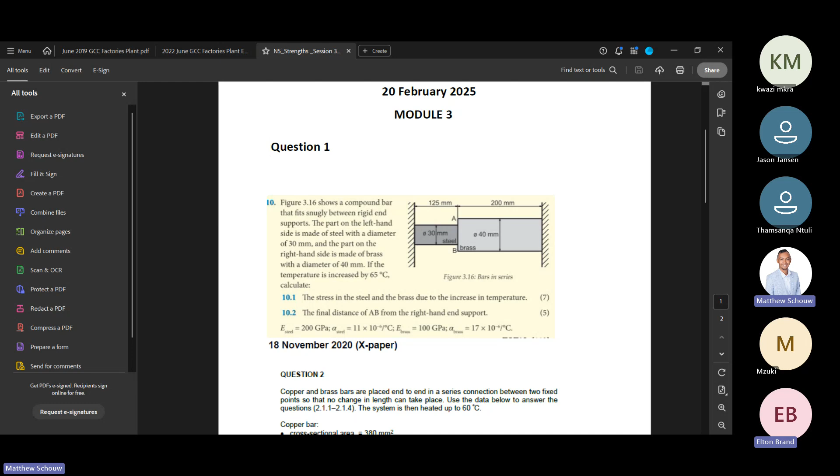I can't see your screen. Did you draw somewhere else? Because I just see the question, I don't see drawing. I drew something here. It's not appearing? Yeah, it's not displaying. Okay, it's on the whiteboard. Can you see now? Sorry about that. Yes, thank you.

Cool. So I was just explaining the loads. There's a pressure load in terms of fluid, water, air maybe. And I'm talking about the change in temperature, and giving a quick illustration of where this could be a big factor. Let me just quickly undo all of this. We don't need that.

All right. So reverting back to the stuff we're going to do, I'm just going to skim over some theory for you. Let me just open up my notes. So again, we have series connection and parallel connection, right? We're all familiar with that. And I want to bring something to you.

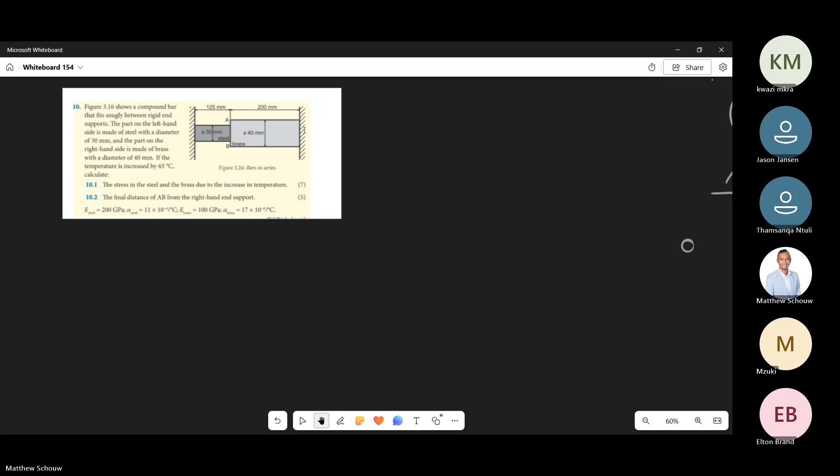It's just a lot of things, a lot of other theory, which I'm assuming you guys are actually going over, and I don't want to do all the Mickey Mouse examples. So, yeah. So when a material is in series, right? And I am accelerating this process here. And I want to take this, okay. So if you have exactly the same arrangement, just to explain to you.

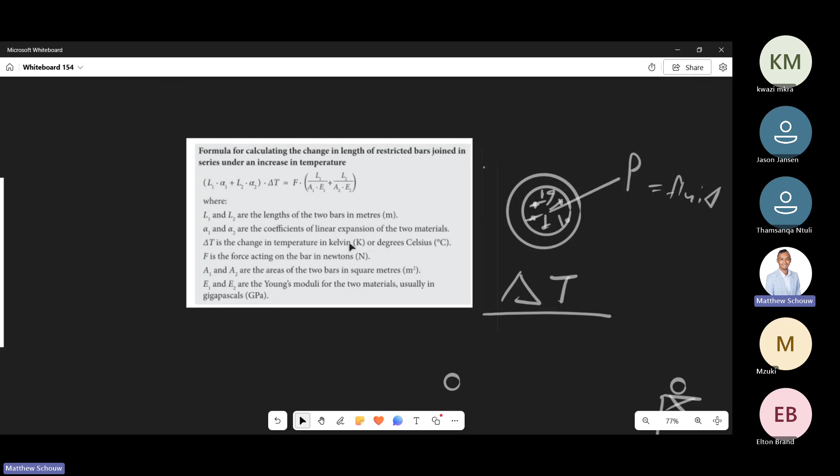Okay, so before I get here, do you recall when we were talking about the previous thing, where we have something like this with another bar in series? You apply a load here, and what happens here? Give me the formulas, the force. The total force is equal to... Jason, Elton? F1 plus F2. Not plus, they're equal to each other. Remember? Series. However, the change in length, we add them together.

Guys, Black Label's not good for the brain, eh?

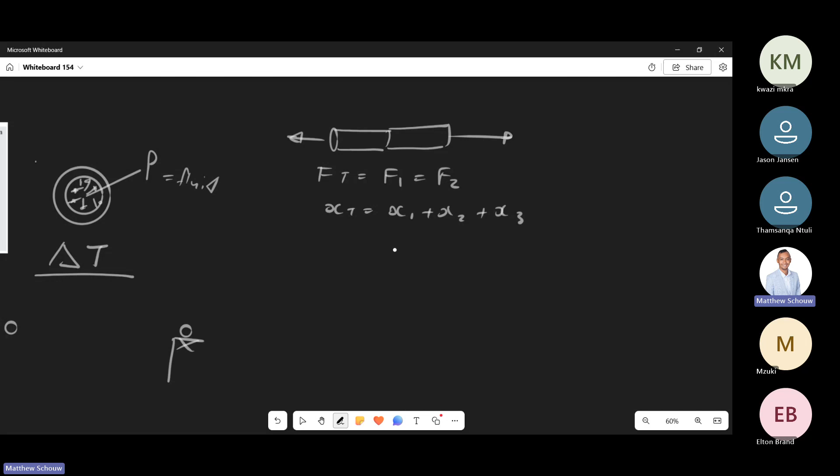Okay. So then the next case would be we have some structure, let's just call it a pipe, and there's another structure inside here, another element. And we apply a load, a compressive load, let's say. Tell me the force relationship here. The total force is component 1 plus component 2. 100%. Whereas the total change in length is? The same. Okay, they're equal. So remember this.

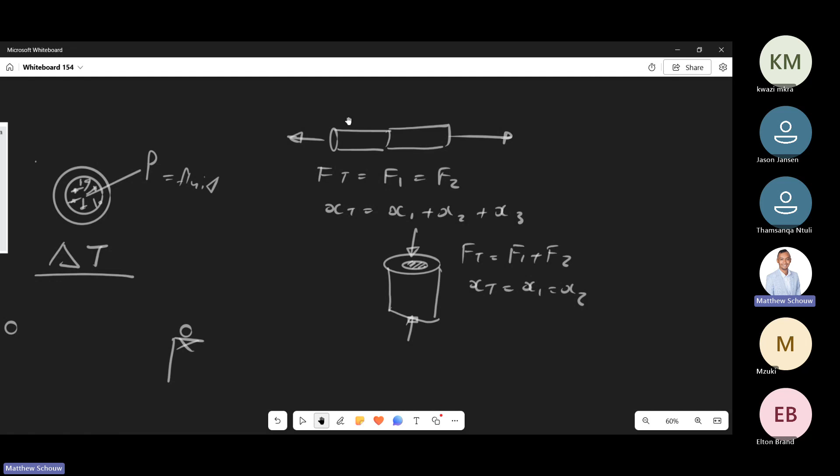This is a separate loading condition. Because as Elton nicely articulated to me via message, we are looking at two different types of loads. One is a mechanical load, and then we're going to be looking at a temperature load. And then what happens with both is that we need to find the resultant. You're going to see that in the parallel example we're going to do. So remember, there's two different loadings happening, one mechanical, which you know, and one temperature load. So now I'm going to explain to you the relationship.

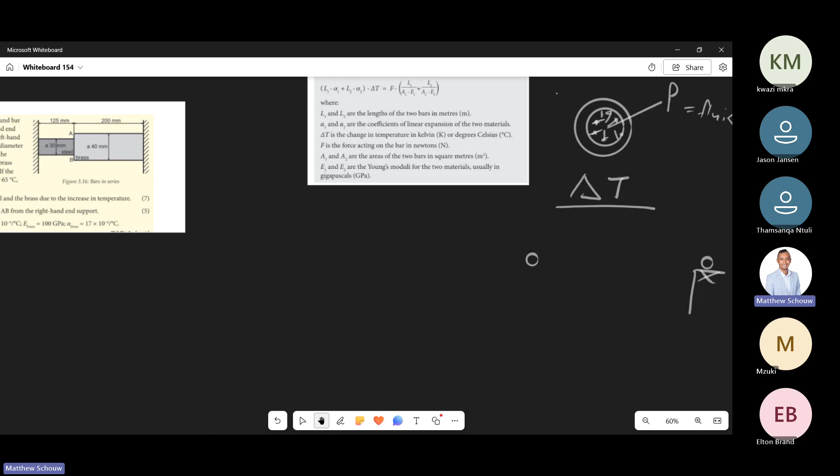So the first thing I want to bring to you is the following. This is for a series arrangement. Let me just close these things here, it's distracting me. Assuming that it's fixed on both ends, they're typically fixed, we have two bars like that fixed, and then we increase the temperature. It becomes hot. So if we apply heat to steel, it starts to expand, right? So this guy grows, and that guy grows.

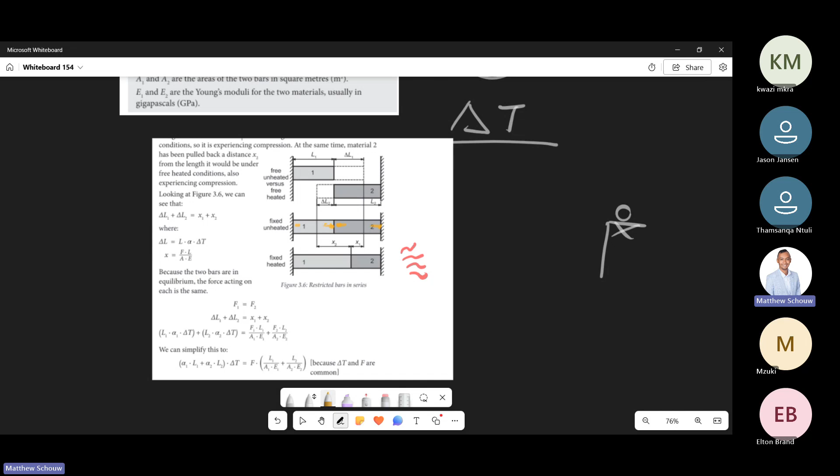But now, as it's increasing in length, because it's fixed, we have a resistance at the wall over here, like that and like that. So what's the nature or sense of stress induced in those bars? Would it be tensile or compressive? Compressive. Exactly, as it's extending, because it's fixed, it becomes compressed. Very important. The same force causing that compression is equal in both, so for a series arrangement, force 1 is the same as force 2.

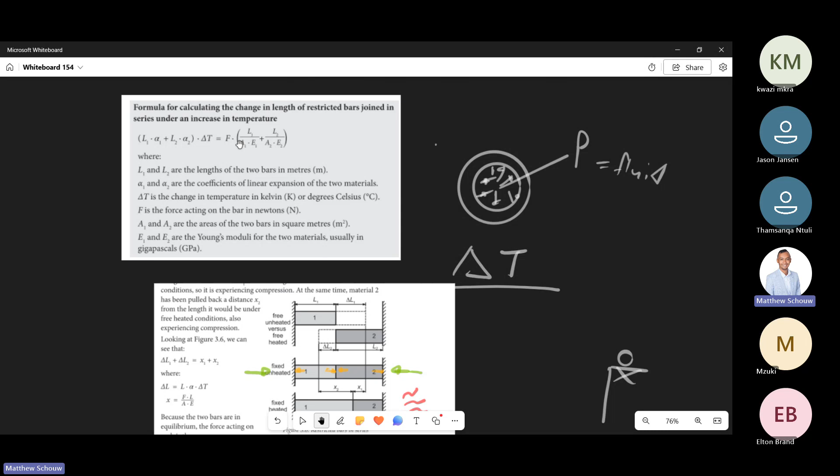And then in terms of the change in length, this formula here is the temperature side, and this over here is the mechanical side. This formula works out the change in length due to temperature for each bar, L alpha delta T, plus L alpha delta T, and it'll equal the mechanical part. Because the force is the same, you can take out F and you'll end up with that formula. This is for series, assuming the temperature is increasing. If it's decreasing, the signs will change. I believe this is in your formula sheet.

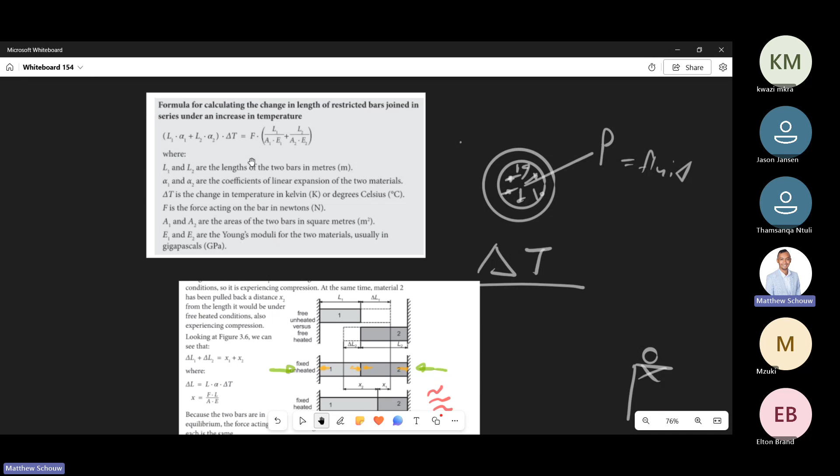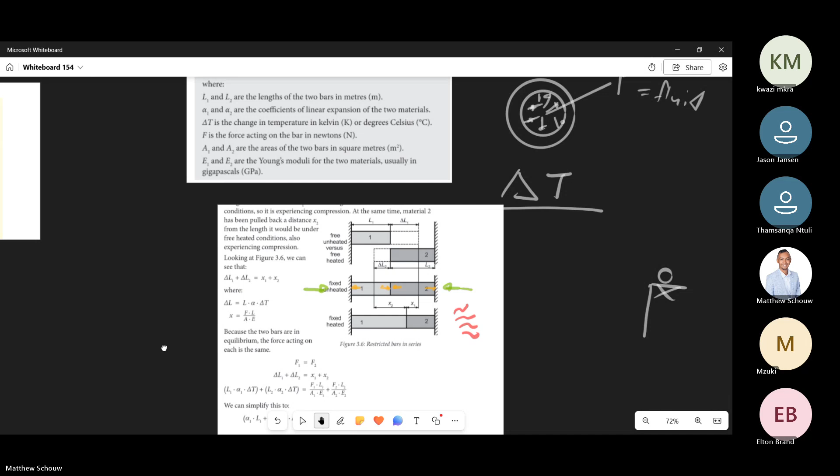Again, we're only dealing with the temperature situation right now. We're going to combine both. But remember that the force is the same. That force going against the wall is the same force compressing it, increasing that stress. So let's go to this example quickly. Here we have a compound bar, and it fits between two supports. One on the left is steel, one on the right is brass. These are the dimensions, and we have an increase in temperature. Let me go red here. Hot.

Of 65 degrees, right? And what they're asking now: what's the stress in the steel and the brass due to the increase in temperature? Okay, how do we begin? So we always start the same as the previous problems. We're going to say F1, 10.1. F1 equals F2, right? We know that stress, right?

I just want to see something quickly. We can take stress ratios, or we can take ratios for... okay, anyway, yeah. So that's the first thing, right? Then I'm going to go to the next equation. And the next equation will be that there. So it's going to be the change in length on the temperature side, which is 1, plus the change in length of the other side, which is 2, right?

Okay, we know it as steel and brass. And that'll be equal to FL over EA of the steel plus FL over EA of the brass. Okay, cool. So now we need to find F, and F is going to be the same for both, as we said, right? It's the same force inducing that thing. So now we need to find all the remaining stuff. Okay, so what do we have?

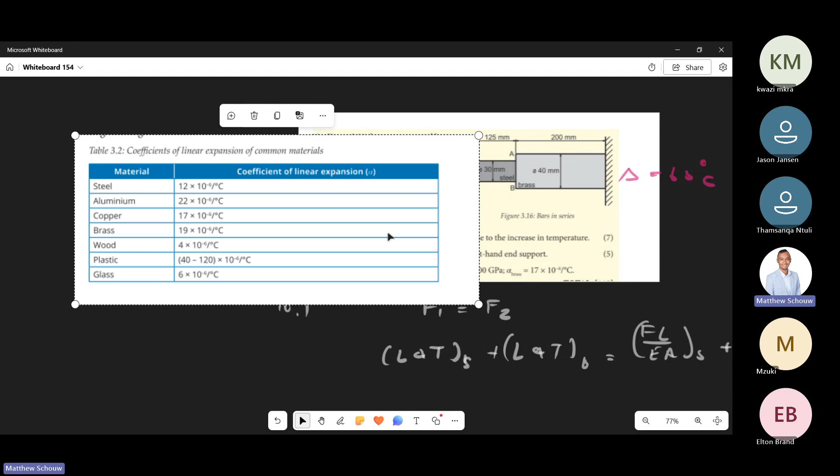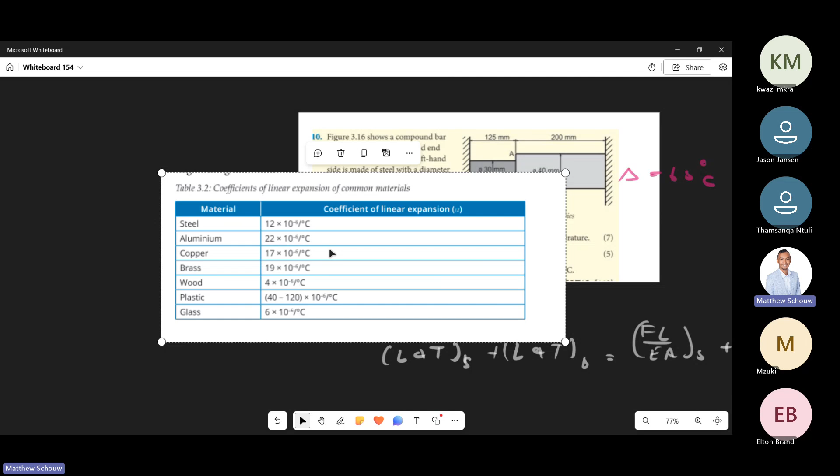So can you see steel has 12, aluminum has more, copper has more, brass has 19, wood doesn't increase that much, and glass doesn't increase that much. Okay. So Mr. Ntuli, can you agree that, I'm assuming you're dealing with steel and copper. I don't know, sometimes the cables have aluminum and copper. Can you see the expansion is a lot more? Is that true, or I don't know? Ntuli is not saying anything. But anyway, so each material has its own coefficient of linear expansion.

So what we're going to do first is calculate the total change in length on the temperature side, right? Which is the same as that side. So the length for the steel is 0.125. A coefficient is given here as 11 times 10 to the negative 6. And it's increased by 65. We must be careful. Sometimes in the questions, they'll say it increased from 20 to 50. Therefore, the increase would be 30 degrees.

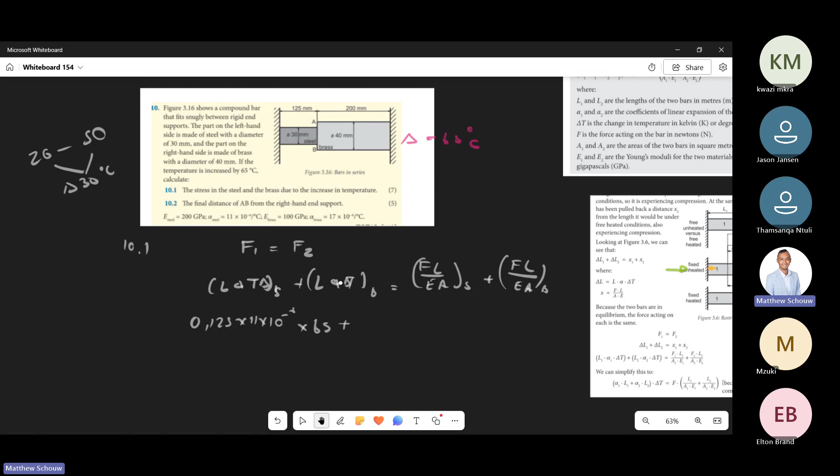Are you with me, colleagues? Yes. Because this is the change in temperature, it's not just the temperature, right? As you can see over there. Okay. And then our next length would be what? 0.2. Brass is higher, that's 17. And we're timesing that by the 65 as well.

Okay. So guys, can you just get the change in length due to the temperature side quickly, right? Yeah, the change in length. Can I just get the total of this side here? I want to put it over here. You guys can work it out for me. And please try to work as fast as possible. Let me know when you got it.

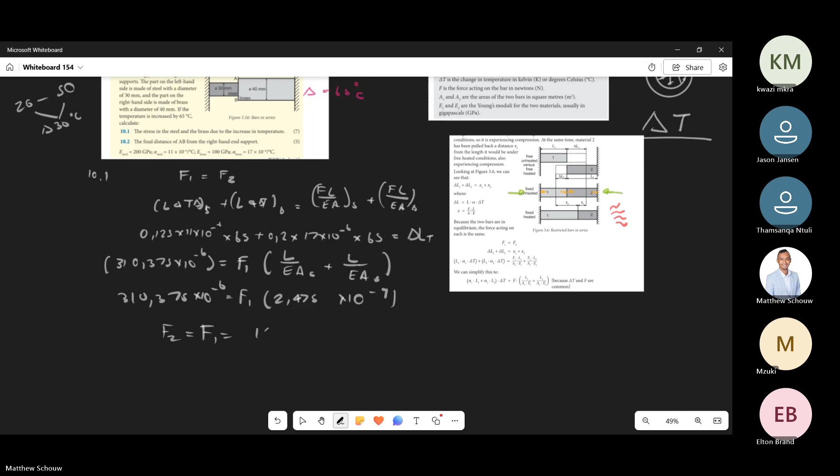I get 125.404 kilonewtons. You guys agree with me? I got the same answer. 100%, okay.

Jason, are you prepared for this next test? Not as yet, no. You sound very prepared, I already covered this. So the parallel stuff is where you're biting your head, knocking your head. I'm at resultant stresses now. Yeah, I'm talking about that then. Yeah, it's parallel, that's on the parallel side. I'm gonna do one of that. Okay, I don't know who else is in the house, I can see more people. Mzuki, Kwazi, you guys, I hope you guys are there.

Our F is 444... 125.44 kilonewtons... 125.4. So guys, once you have a force, for us to find our stresses in each one is quite easy.

Right? You're gonna take that force and divide it by the area, am I right? So that'll be the area of steel, and then just bear with me here. And that's the area of brass. Obviously, just bear with me, I'm trying to cover enough ground. You guys can quickly compute that. What is important here, you put the sense as well, tensile or compression.

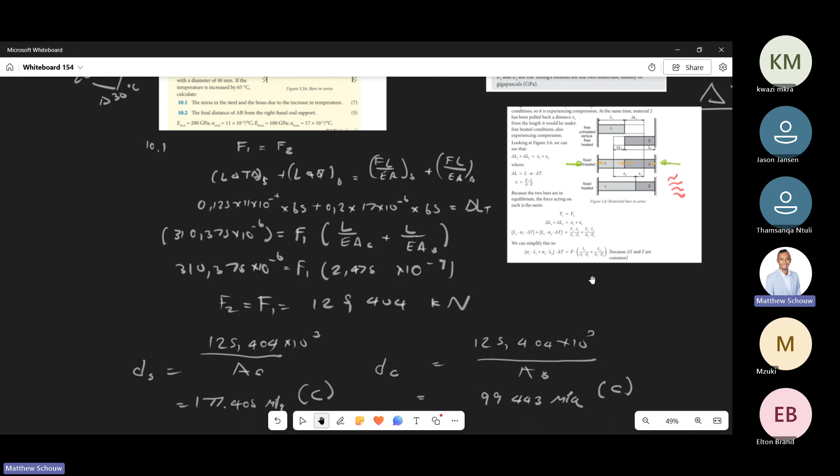So the last one is the final distance of AB, right, from the right-hand support. So basically we want to see how much this thing actually extended by, right? So let's look at AB there. The final distance of AB from the right-hand support. The right is on the side here. So looking at this side and how much is that essentially pushed.

So how that works is quite simple, is that length, right? You take the original length, which you obviously have. We have to work on the original length because, yeah. And then remember, we had an original length, but at the same time, we had an increase due to temperature, right? You guys agree with me? You guys remember? So there's a length over here, all right, and then we apply the temperature increase, and so therefore it increased, am I correct? Yes, it's correct.

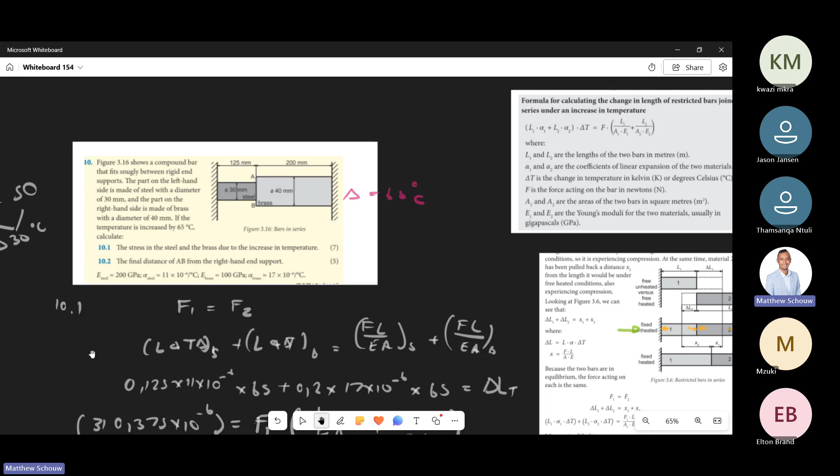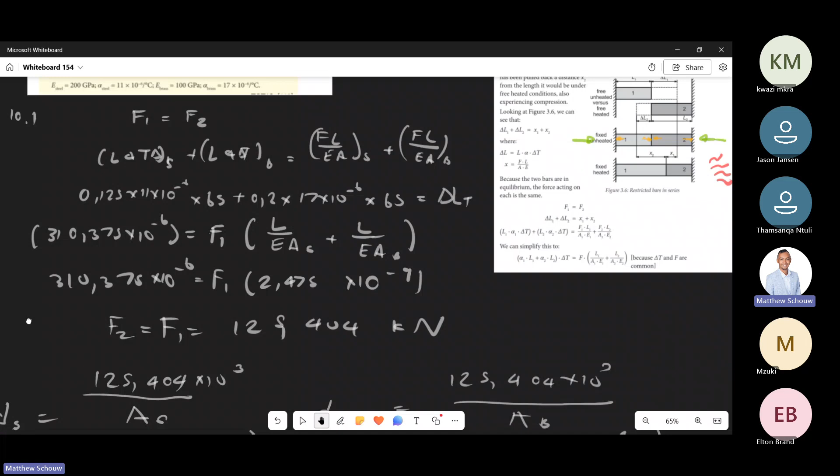That change in length is the same one you worked out over here for the temperature, but only for the brass, right? So the brass was this one over here, you see there? That piece here. What was it? 65 times... it's 0.2 times 17. Yeah. Okay.

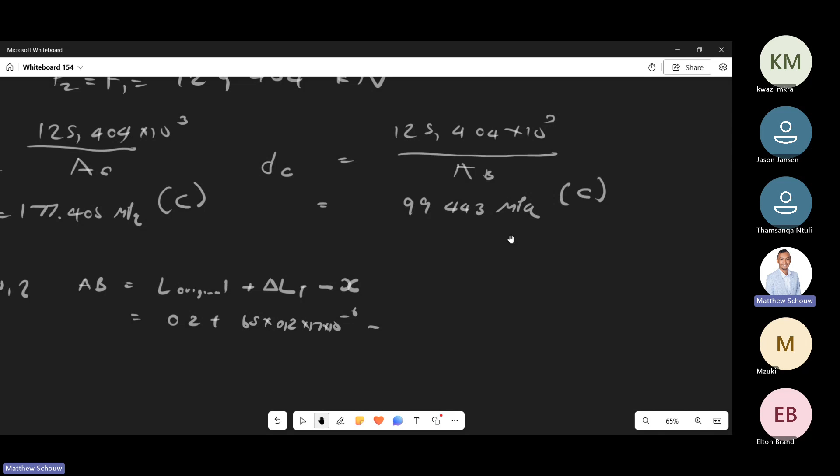And then this part is now the mechanical part. So we found that stress induced for this compression to happen, and that stress for the brass was 99.443.

So for this one, you can actually just use your FL/EA, that's your mechanical extension. So you take the force - there is a shorter way to do that, but I don't want to get into that.

You take the force, 125.404, times it by that length, 0.2, divided by the elastic modulus, which was 100, and then you times it by the area of the brass. If you do this, you'll get how much it actually increased by.

What I'm telling you, you can do it either from the left hand or the right hand. But if you do it on the left hand, you're gonna have to use steel. Should get the same answer. Are you with me, colleagues?

Temp, fixed compression. Yeah, at least we're half past now, so it's fine. We can move on to the next one.

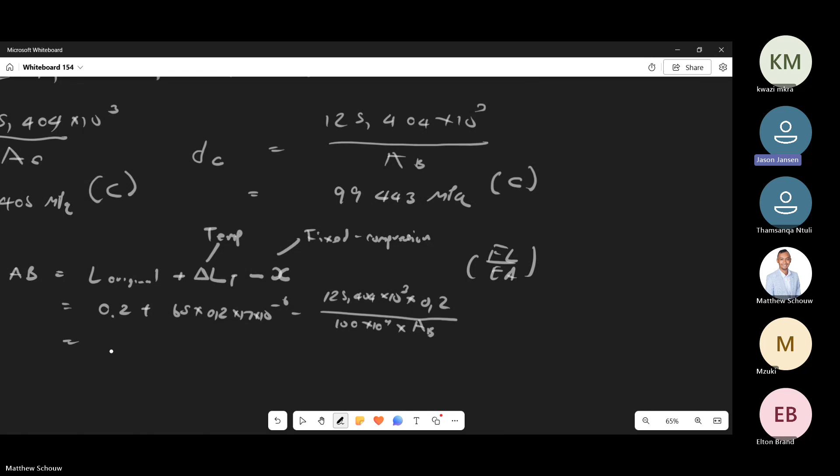And what do we get? I got for the total, 41.443. You will just check again, I think. No, it shouldn't be, shouldn't be.

I see my mistake here. Yeah, I basically used the stress relationship but I added the area as well. I see. If you want, this is the other way, this is the same thing here. You see? Same thing. I just keep it the FL/EA for you guys because that's what you guys know.

Well, this book is always like that. So, what's my final answer there? So we can move on, guys, to the next question.

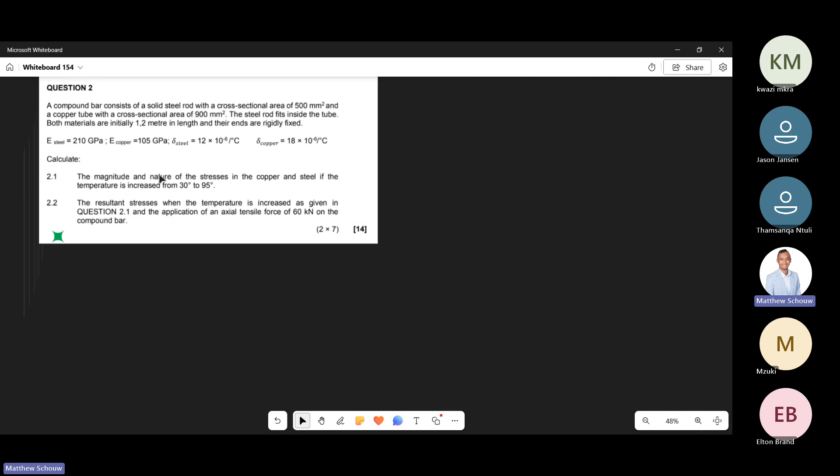So now I'm gonna give you an overview of what's happening here. In this thing, the questions are typically asked, right? The first question, or sometimes they can switch it - we first only look at the temperature load. You understand? So what I mean by that is here we have a compound bar, right?

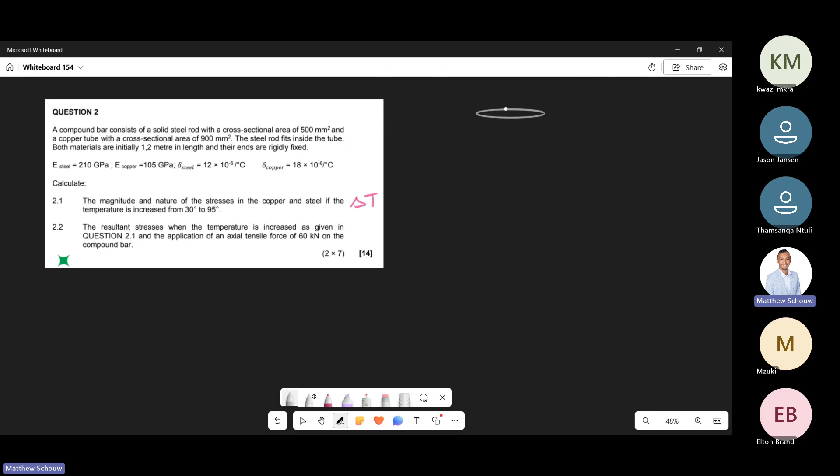Are you with me, Jason and Elton and Mr. Ntuli? Yes. Mzuki? Yeah.

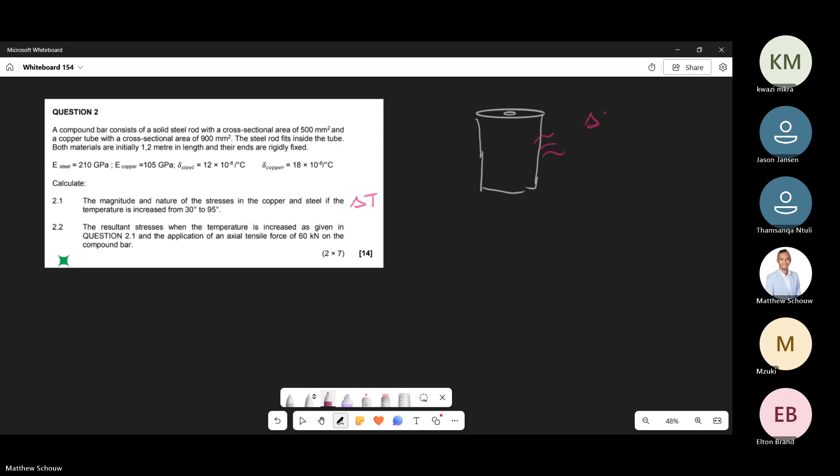So the first thing is we've got an increase in temperature. We've got to do an analysis there, right? Then we're going to find certain stresses in that guy and in that guy. In this case, we have a copper tube and a solid rod, right? Each one of them will carry its own stresses depending on what's happening, whether you're increasing or decreasing. I believe you're increasing here, right? So talk about that now.

Subsequently, we then now apply a mechanical load. Now, when we do the mechanical load, we must use these equations. Remember this? What you mentioned to me? And then we get other stresses now, which is going to be stress in copper and stress in steel, right? Can I make these other ones red so you can see what I mean?

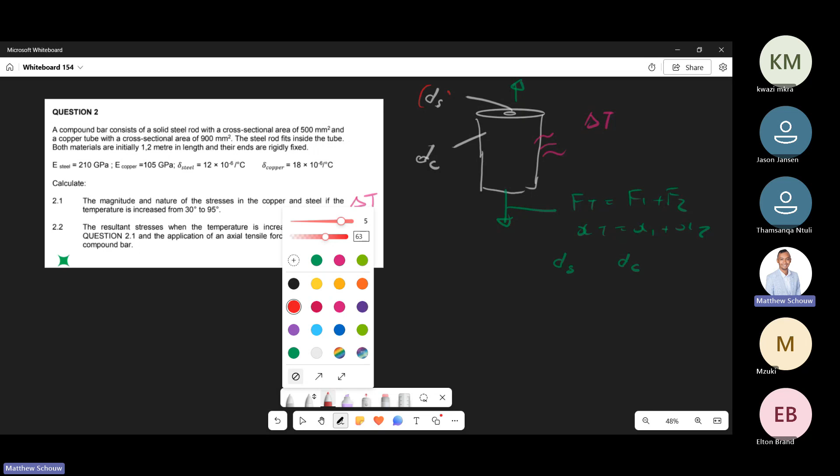Are you with me? So the first part is looking at the temperature section, getting that, and getting the stresses. And then coming to the mechanical part, which is 2.2, and we get that. Then in the end, we must now add the stresses of the steel and that one, and we have to add this one and this one.

So what you tend to find is that the stresses will be different, right? So remember, steel will be positive, copper is negative. Are you getting the overview of what's happening? There's a temperature load, and then we're having a mechanical load, in this case the axial tensile force, and then we're going to add the stresses together. Are we on the same page?

So, is everyone else on the same page? Yes. Cool. Kwazi and Mzuki, yes, sir. Following, 100%. Following, yes, sir. Okay.

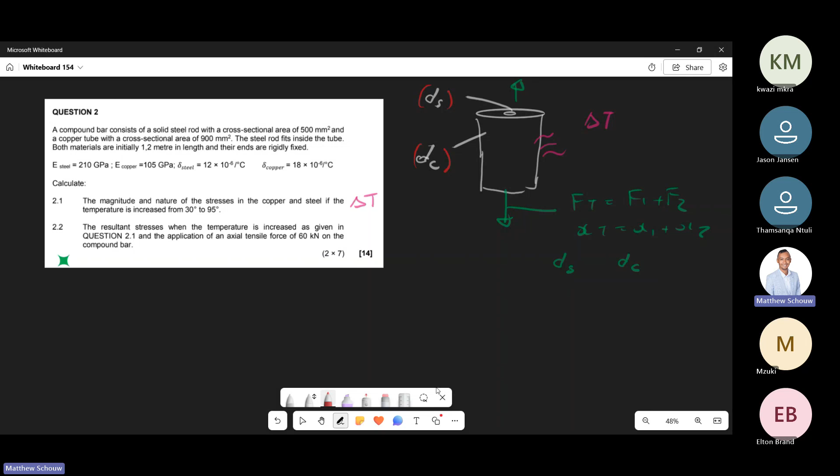So let's begin. So now I'm going to talk about the parallel arrangement only for the stress, right? We already know the mechanical one, we did that in the last chapter. So how does this work now?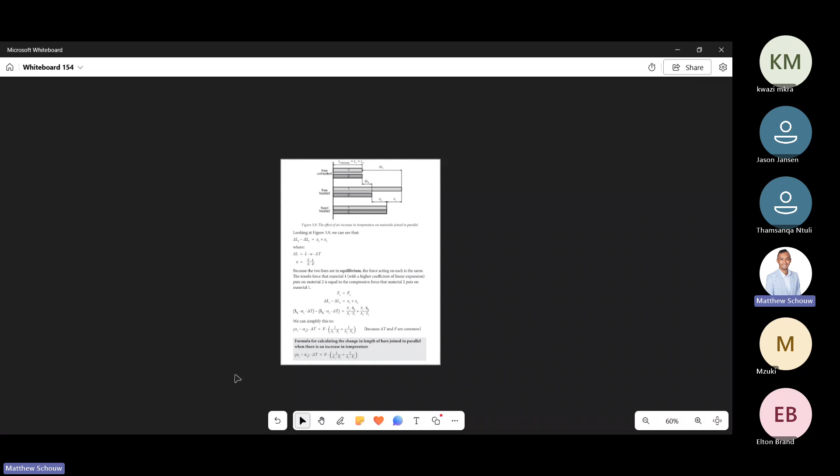So for a parallel one, I'm just going to pull the note and paste it here for you. So in this case, let me clear the whole canvas there. Here's parallel, two bars next to each other, not like the other one. And again, we're assuming that they are fixed. That's what's important here, okay.

So the first thing I want to tell you, right? They're saying here, so basically what's happening is that we have one bar like this and another bar like this. And these could be conductors, right? And they are fixed, I believe, they should be fixed. And what you find is that one bar will extend faster than the other bar, and that will be because due to the alpha, right?

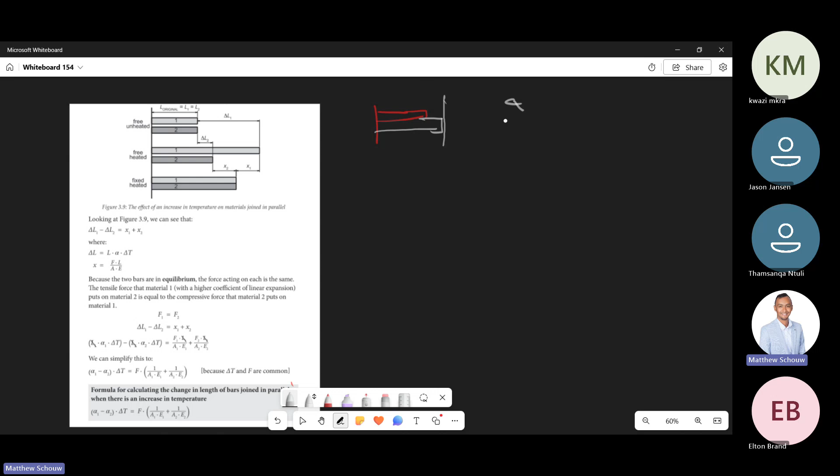And what they say there is that when they get heated, they will expand. And they say because the two bars are in equilibrium, the force acting on them is the same, so our relationship of force is the same. But then they say the tensile force that material one is experiencing, which is typically the one with a large expansion - in my case it's the bottom, but it's on the top - puts on material two, because they kind of join, I believe, and is equal to the compressive force. So the tensile force that material one puts on material two is equal to the compressive force that material two puts on material one.

So what is important here is that you notice that one of these elements will experience a compressive force, whereas the other one will experience a tensile force, right? So looking at this proper sketch here, okay, I wonder if I have a better sketch, but okay, let me find this one. I want you to tell me in this case, what are the stresses? You guys admit that, student? Okay, cool, I'm gonna show you.

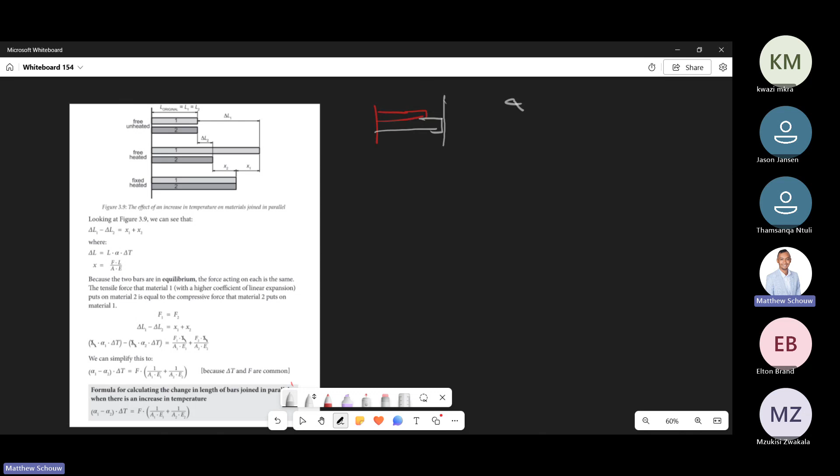This is from Drotsky, Strength of Materials for Technicians. Show you now. If you're unable to imagine what I'm talking about, maybe this will be better, I hope it will be. And if you want this book, just let me know, don't think we're getting into trouble sharing this one, it's quite old. So like here we have a better illustration. So free expansion basically just means there's no restriction, but in this case there's a restriction over here, right? The ends are blocked. So what I'm saying is,

if it's fixed and we're allowed to expand, right? Can you tell me what stresses do you think is going to happen in the one in the middle, which in this case the one in the middle has the longer alpha, the bigger alpha, where that is greater than the second one. So let's say this is copper on the inside and we have steel on the outside. So what stress would happen in the middle? Compression. Compression, exactly. And then what do you think is going to happen to the one on the outside?

Look at this sketch here. Tension. Tension, exactly. This guy, I don't know what he's smoking, but we need to get on it quickly. That's the main aim here.

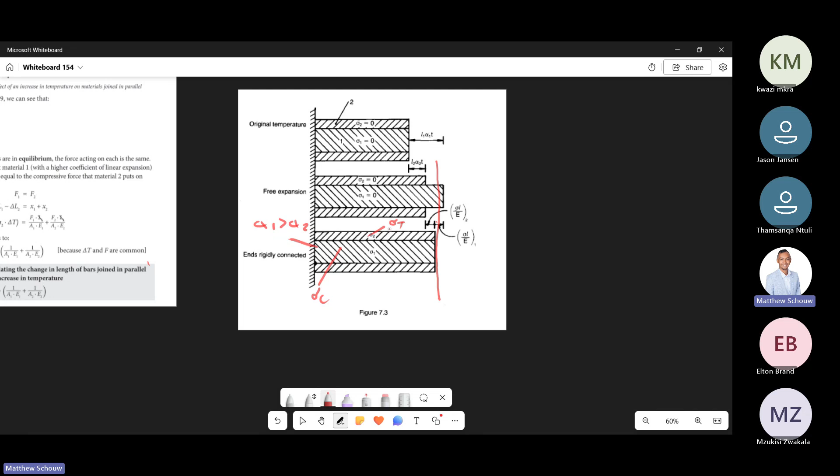So in the temperature side, when you find the stresses, you notice that the one with the larger alpha, coefficient of linear expansion, will get compression in the case of a fixed case, and the other one will be tension, right? So again, if you want this text, I can always share it. So how do we do the thing for the other one? It's exactly the same as before.

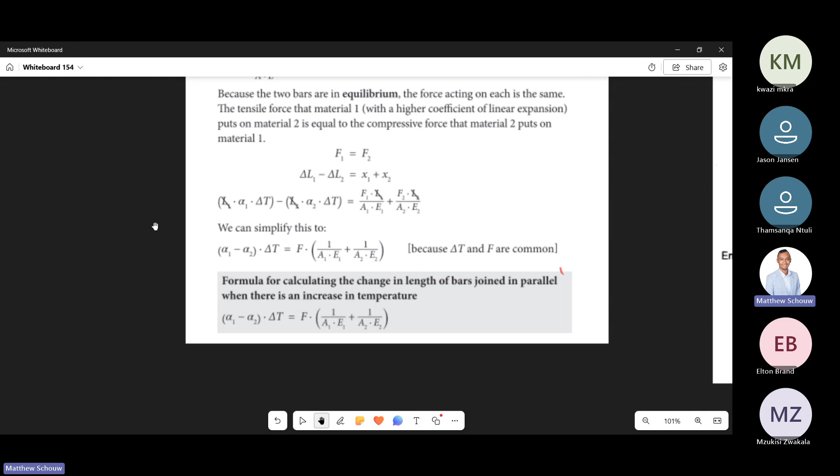And for the temperature one, our forces are the same, exactly as before. But now the difference is the changes in length are different because one is increasing in length, one is decreasing in length. And long story short, because in parallel we assume the lengths are the same, we basically work on this formula. Alpha 1 is the one with the bigger linear expansion, and alpha 2 would be the smaller one. That's basically what we're going to be working with over here. I hope that is clear. When it decreases, it kind of changes, but you guys are going to have to investigate that one.

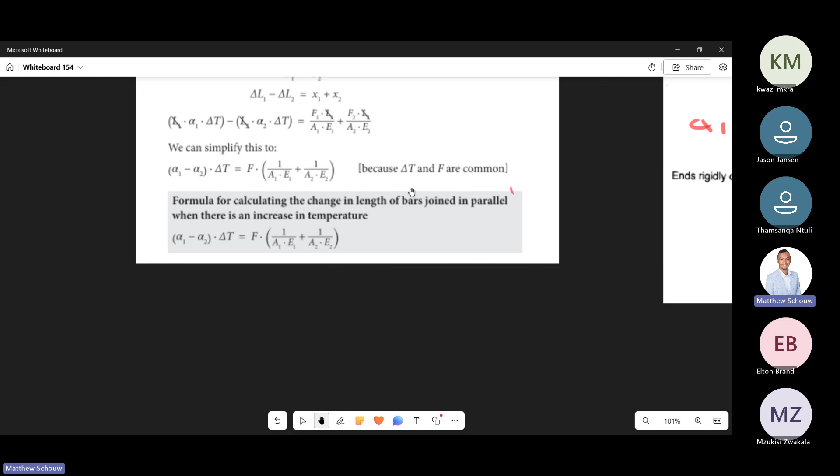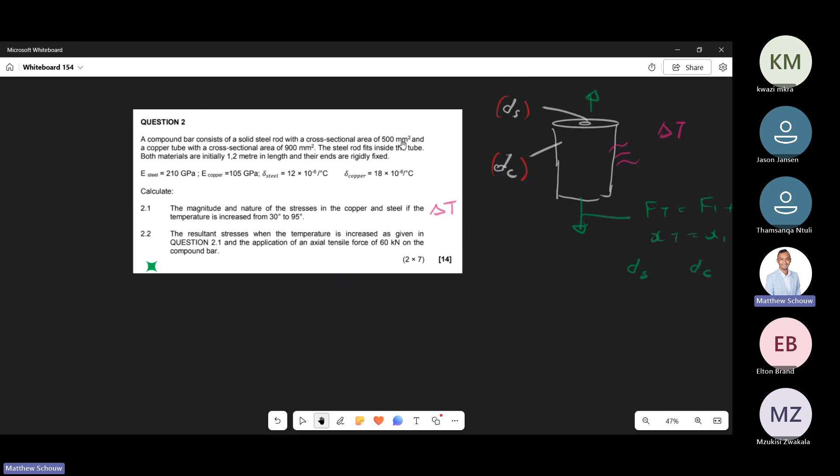So let's try and solve the question quickly. I hope you're all on the same page. So let's look at this one. A compound bar consists of a steel rod inside, with a cross section of 500 millimeters squared, and a copper tube on the outside. The steel rod fits rigidly inside. They're both 1.2 meters long. Find the magnitude and nature of the stress, tensile or compressive, in the copper and the steel if the temperature is increased from 30 to 95.

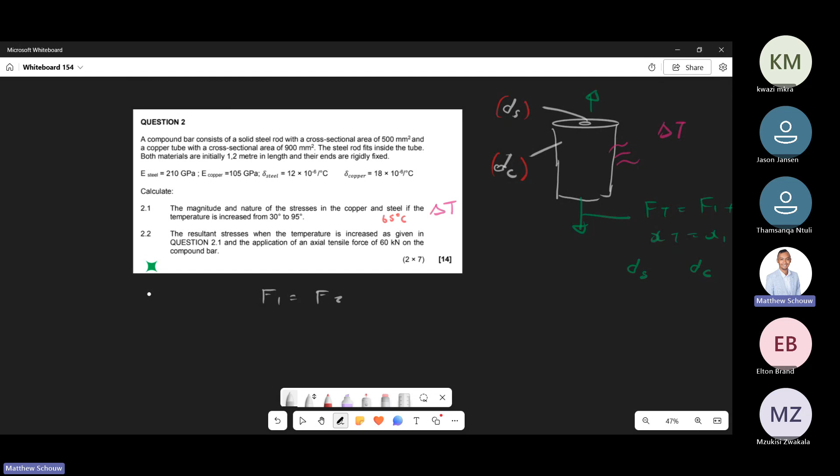Again, in this case, can you see, colleagues, that there's an increase of how much? Mr. Ntuli, can you please tell me? 65. Exactly, 65. So then, the same. We know that F1 and F2 are exactly the same. I'll just call this 2.1. And now we just go back to this formula, or this relationship, telling us what's going on.

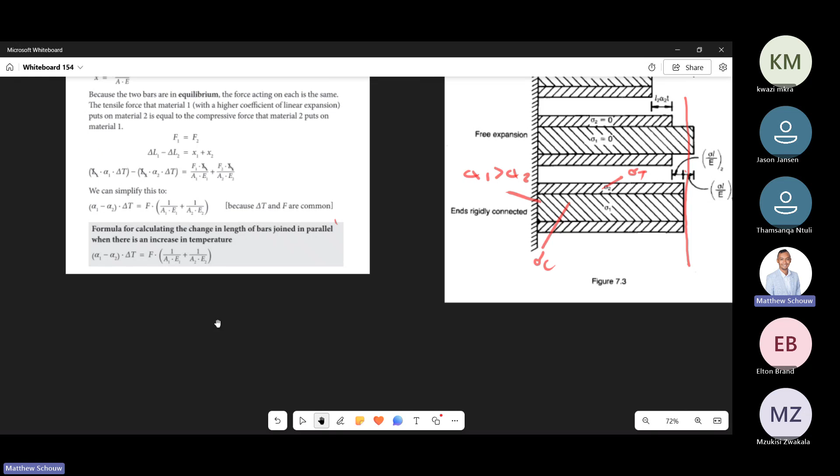So now it's going to be alpha 1 minus alpha 2 times change in T. The length is all negated because the length is exactly the same. So it is F L over E A. Can you see the L's cancel, because they're all the same length? And then we're basically left with F, open bracket, 1 over E A, and this will be the copper or the steel, it doesn't really make a difference. All right, so it's a matter of populating now.

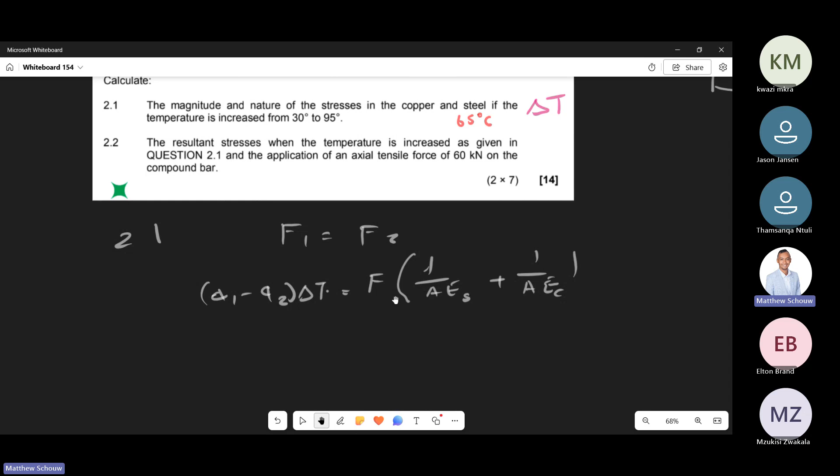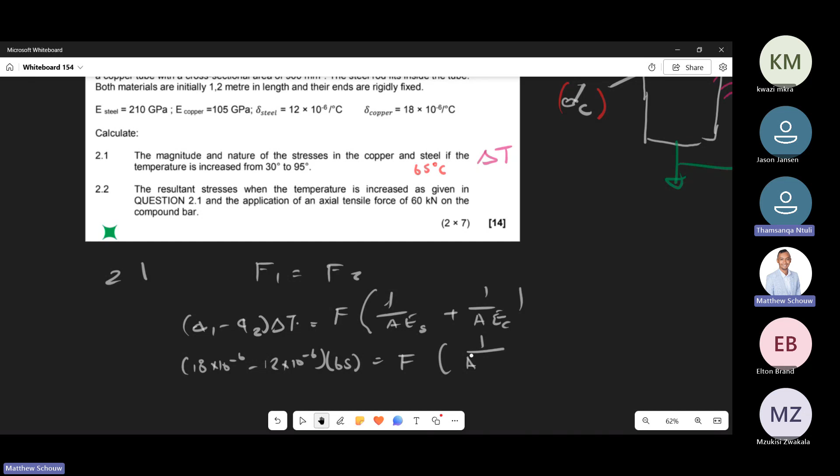So our linear coefficients of expansion are 18 and 12. So this is 18 times 10 to negative 6. Then our change in temperature would be 65. F is our only unknown. And we have 1 over the area of steel, 500 millimeters squared, so 500 times 10 to negative 6 times 200. Plus 1 over, what's the other one again? 900, right? The tube is 900, and it's 105. It's 10 to the negative 6 as well.

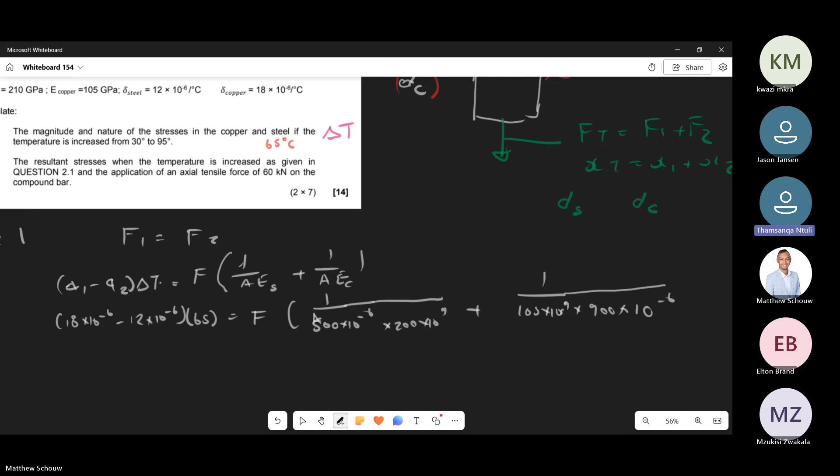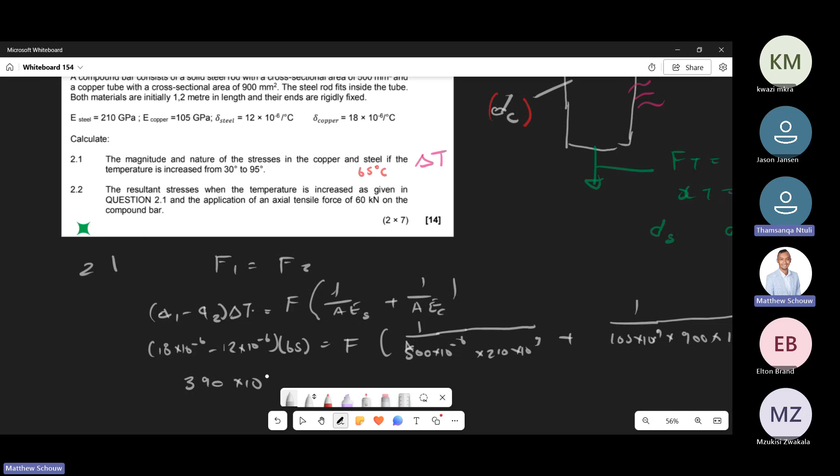On the coefficient side, I put 390 times 10 to the power minus 6. Sorry, Mr. Ntuli. Oh, this is 210 here. Sorry, what were you saying? I'm saying on the coefficient side, it's negative 6, sir. The answer is 390 times 10 to the power minus 6. Thank you very much. 100%. So you guys can solve for force for me.

I'm not going to do that part, so we can move along nicely. You must sort this out, and get the force. And once you find the force, find the stresses for me as well. Can you guys see my screen still? Okay. I'll give you guys 3 minutes for that.

I just want to go to the toilet quickly.

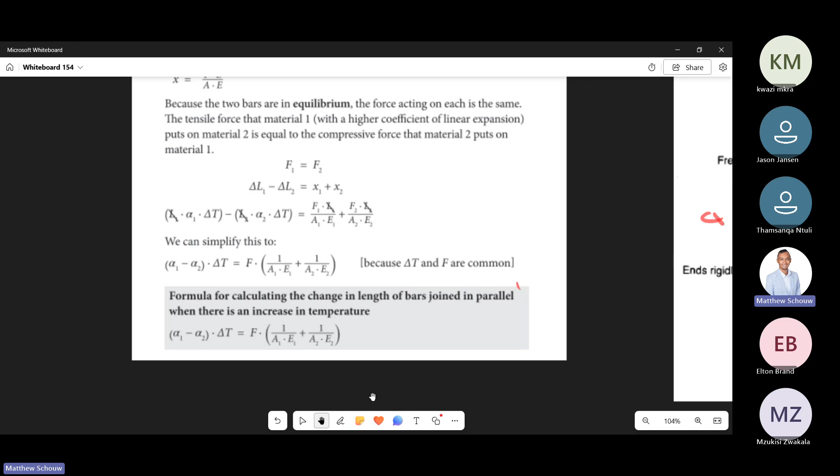Again, parallel arrangement. Okay, right. Okay, when you're ready, you can give me the answers. You need 1 more minute. No, it's calculate that thing.

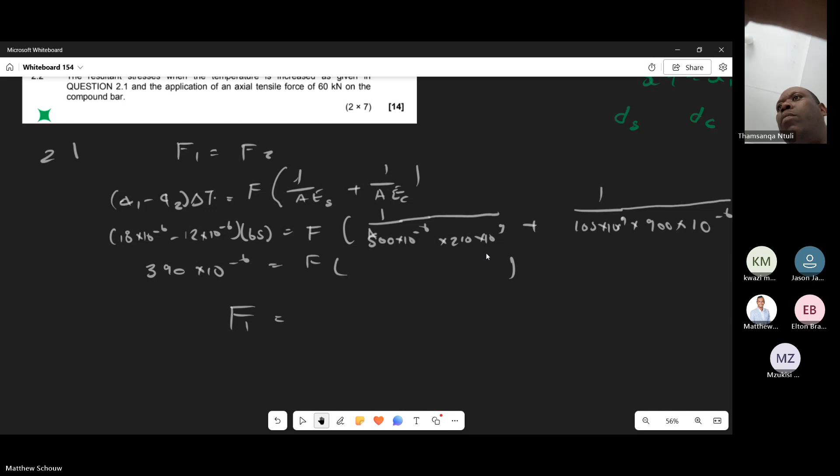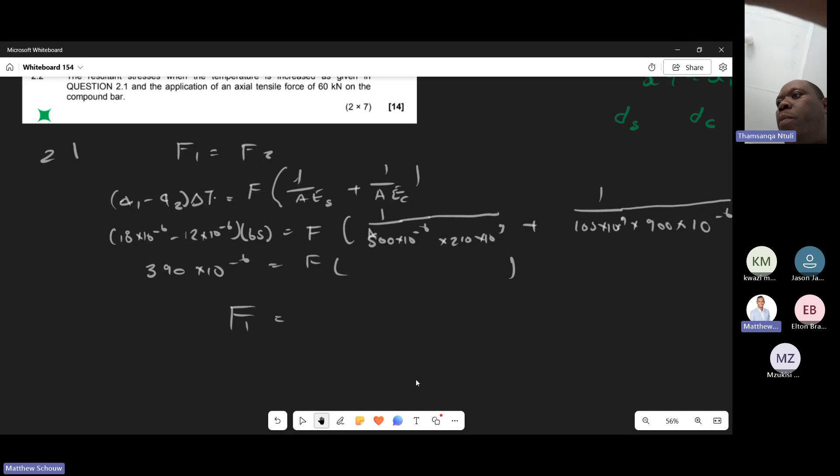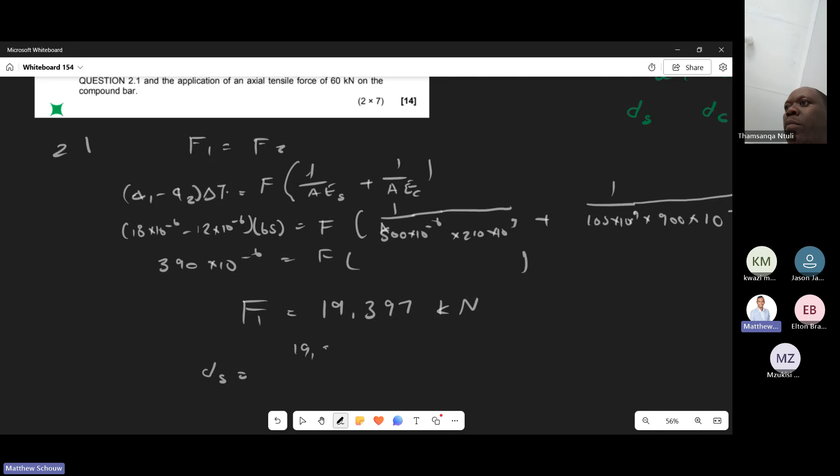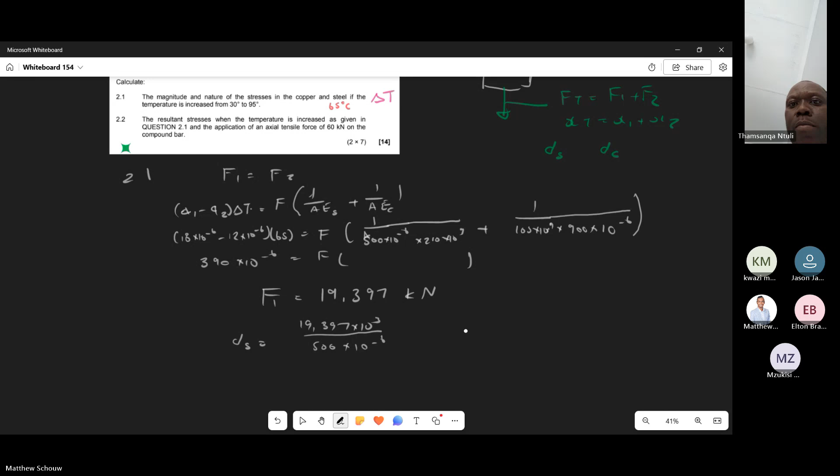Yeah, Mr. Ntuli, you can see working hard. Okay, yes. I'm getting 19.397 kilonewtons. Okay, so once you're done with that, you find the stress in the steel. It's going to be this. What's the stress in steel again? The area there for steel was 500 times 10 to the negative 6. And the stress in copper is 19.397 over 900, no?

So I want the magnitude and I want the nature. What do we get? We're getting 21.552. Perfect. Okay. Who is that? Okay, I took 21.552. Cool. For steel, no? Just for copper. Oh, for copper, yeah. I'm still calculating. Okay. Is that for copper? Yeah, that's for the 900. Okay, copper, yeah.

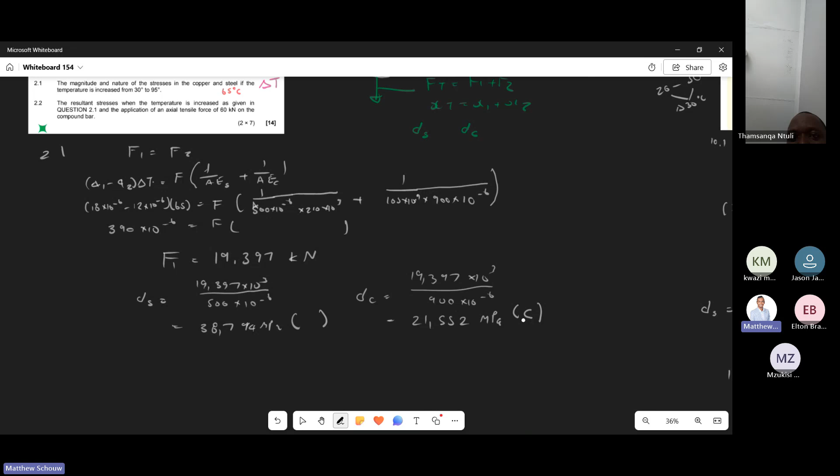Now steel. I'm getting 38.794 MPa. Thank you, Chief. 38.794. Okay. So going back here, can you guys recall the sense? The copper was in the middle, right? This would be compressed. And this guy on the outside, which is the steel. Sorry, it's the other way around in this case. In this case, the copper was going ahead, no? So that means the copper will experience compressive and the steel will be tensile. You guys agree with that?

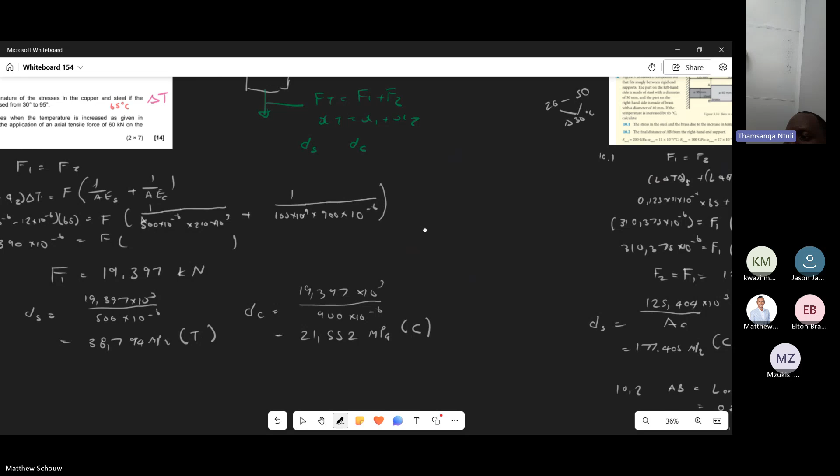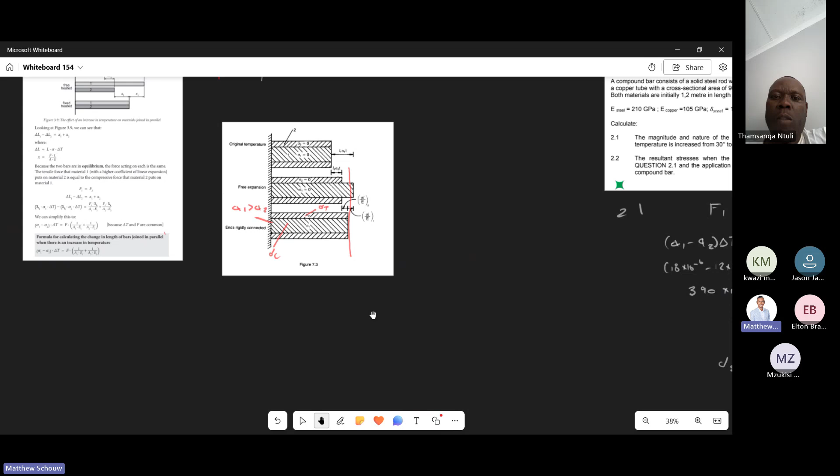Yeah, perfect. How do you determine that now? How do we know the difference between the one which is getting compressed? Like I said to you, if I'm using this sketch now, it's the inverse of this, Mr. Ntuli. So instead of the inside being faster, the outside is now going faster, because this has a higher coefficient of expansion. How much was it again? 18, no? Because remember, this will grow faster in length. And this one will be 12. Yeah, 12.

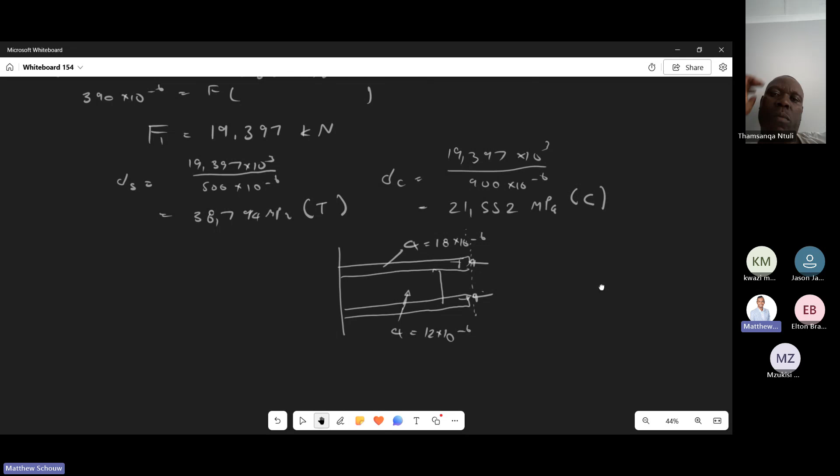Obviously I'm not sketching it all the way, but this would be compressed, assuming that it's fixed, which in this case it always is. And this guy would be in tension. The reason why this is compressed is the same as the series thing we discussed, remember? Normally it's always the one which grows faster, with the higher coefficient of linear expansion, which is compressed. If it's lower, it gets tension, because the other will reach the wall first. Normally when I teach this, I do increase, decrease, compression and tension. You must conduct an investigation this weekend.

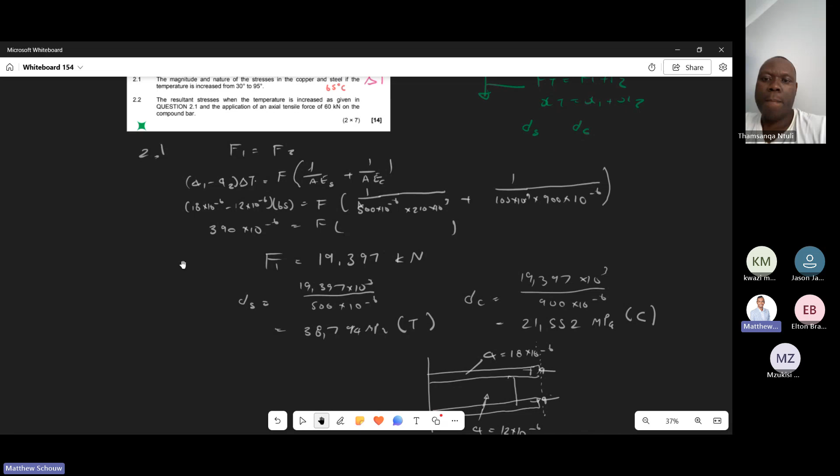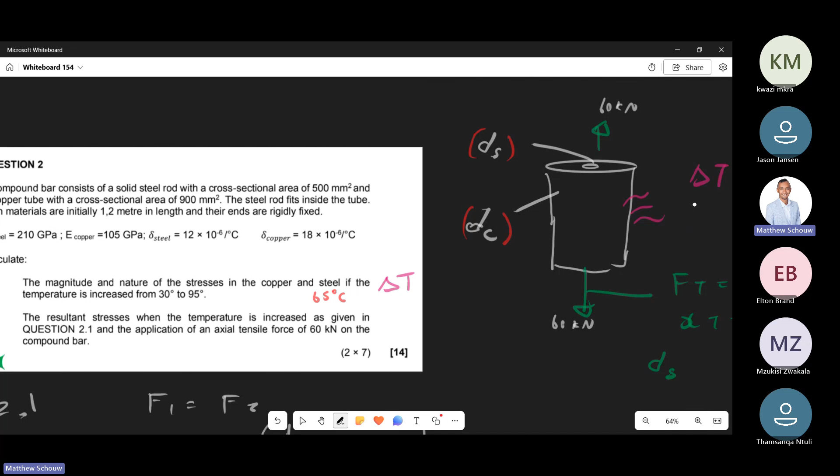All right. So what we've done now is only the temperature part, right? And now we must come to Old Faithful, the stuff you did in module 2. In addition to that, we have an axial tensile force of 60 kilonewtons. So now we must do what we did before in the other chapter. You remember in the test you did this. So in this case, at 2.2, F total is equal to F1 plus F2. You guys remember this? And therefore, that's going to be 60 kilonewtons.

Right? That's F1. And remember what we had to do, what do we look at again? Is it the extension, right? Total is X1 equals that. And then normally we're going to say the extension of the steel is equal to the extension of the copper, right? Same extension. But the difference is you're going to get a ratio between the steel and the copper. Is it not so? You guys remember that? Yes. Yeah, so give me that ratio quickly. And in fact, you can eliminate the lengths because it's the same length.

So I'm gonna put, yeah. Jason, is this becoming a bit clearer in your eyes? It's only the last part where you actually get the resultant. Don't worry. You have the best here. But let's get that ratio first. This is the mechanical part now. Okay.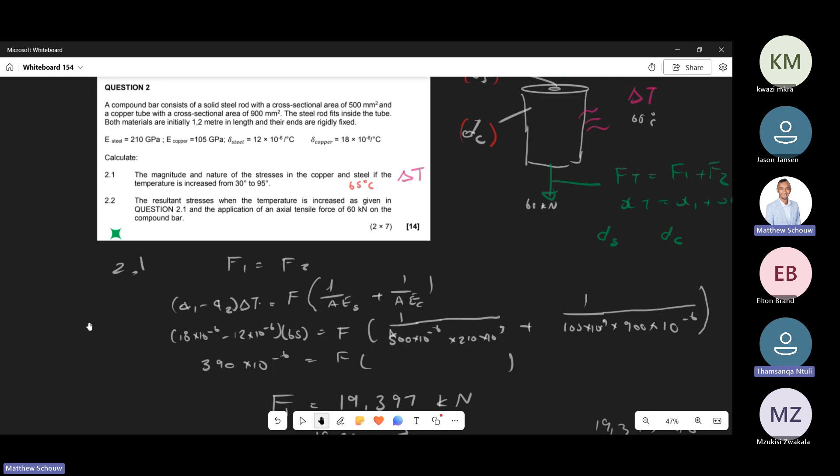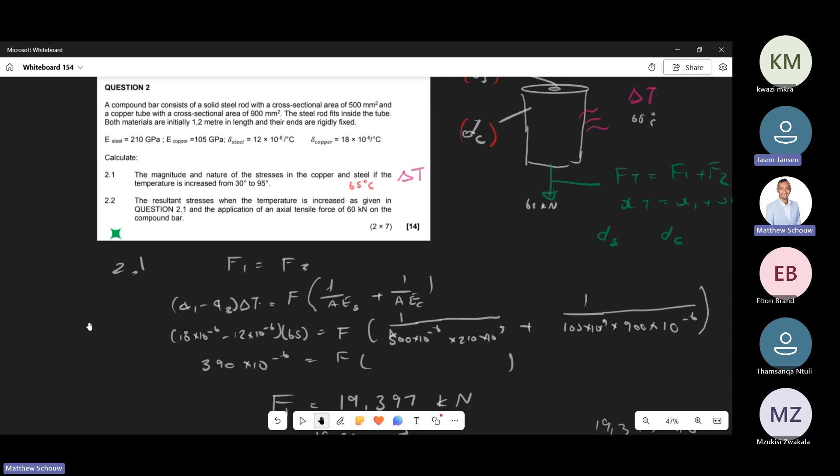Okay. This is 500. That's good. Yeah, I checked again, I get 0.9. But the other way around, it should be 1.11. Let me just double check here, because I'm seeing something else. Let me just confirm something. No, I think you're correct. You're correct. But I'm realizing there might be another. I see what the issue is. Yeah, I think you're definitely right.

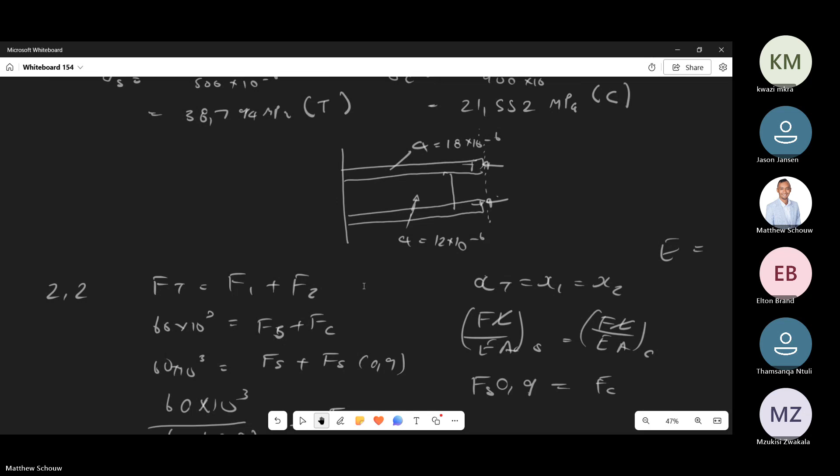Okay. No. Wait. I'm getting one. It can't be. It should be two or half. I'm getting 1.111. Matthew, can you go up so that we can confirm the numbers? No, I think you guys are right. Sorry, my bad. So 0.9. It's fine. So what is my force in steel? Sorry about that, man. I think my anger was kicking in. So my force in steel should be. Sorry about that, guys.

31.58 kilonewton. Are we happy with this? Yes. And therefore, our force in copper must be 0.9. Should be 35. No. What am I talking? 28.42. Yeah, 28.4. Sorry. The anger is kicking in. Okay. So once we have that, we then have to compute the stress as we did before. So 31.58 kilonewton, and we divide that by the area of steel, which was 500. And then we must do the copper with its respective area.

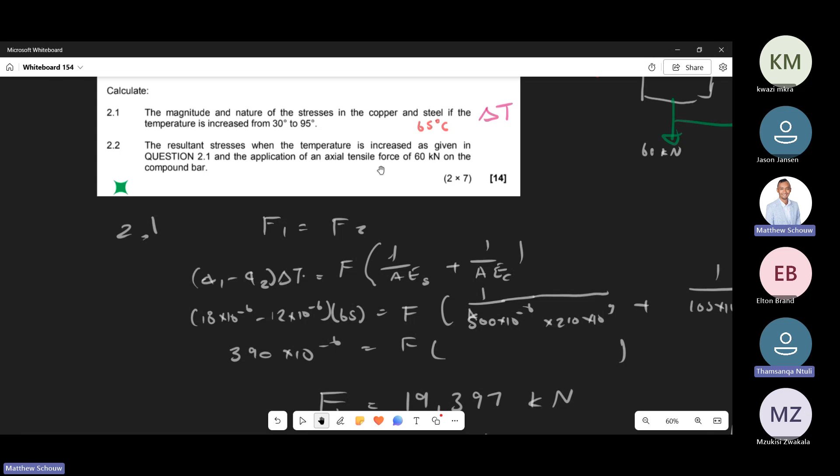And our colleagues, what is the sense of this force? Do you guys remember on the mechanical side? What's the sense of the stresses? Compression. No, mechanical. Tensile. Tensile stress was induced. Right. Okay. Are we happy with this? You're playing with the big boys now.

Let me do it like this. Okay. So what you can do now for your table, like this. Stress of steel and copper. And here we put, just want to remove this.

Can you just mute your mic, Chief?

I was talking. And here we can put temperature load, and here we can put load. What can I call this? So a mechanical load, no? You can call it something else, but then over here we have the resultant over here at the bottom, resultant stress. Okay, it's quite simple. So let's go back to our loads on the temperature side.

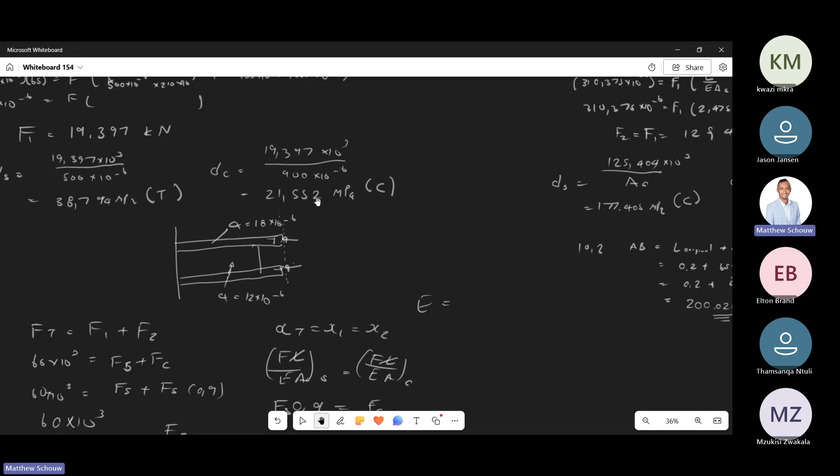And we saw that the steel had a 38.794 tension, right? And that was a plus, right? Because it's in tension. We then go to our copper load on the temperature side. It is 21.552. Are we happy? And that's a negative because it's compression. You guys agree with me? Yeah. 100% right? Then on the mechanical side, we had, for the tensile load I should rather say,

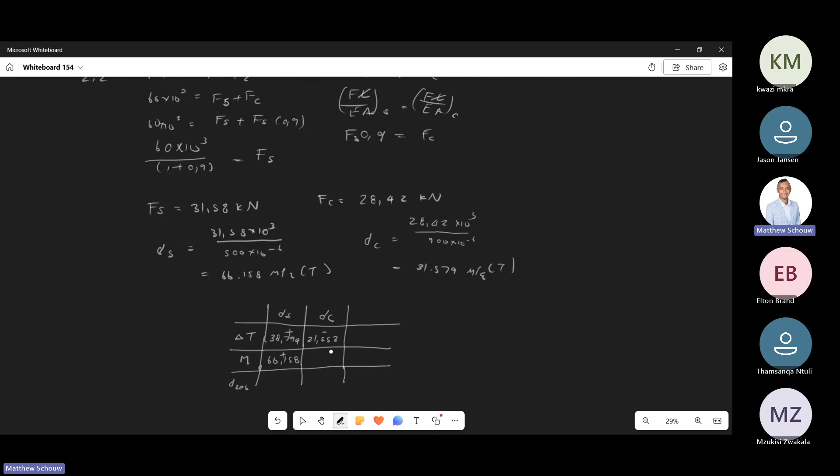for the steel, we had a 66.158. And here on the copper side, we had what? A 31.579 positive. Are we happy? Does that make sense to you?

Colleagues, does it still make sense to you? I'm lost, but I'll catch up. Okay. Who's that? Listen to again. Oh, okay. Who's that? Kwazi. Kwazi. Okay.

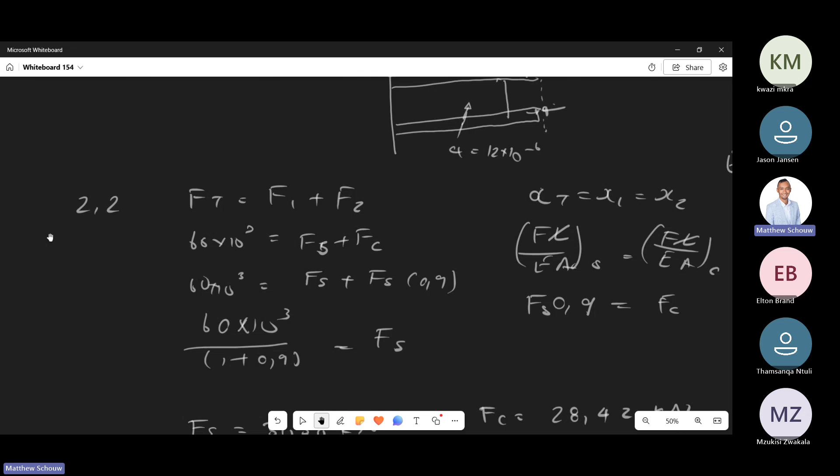So again, remember the question was asking for the resultant stresses, right? So we're first checking now for the temperature, right? And then we put those stresses in this table there, right? Okay. 38 and the negative. Then we look at the mechanical ones we just worked out now. And it's over there. All we have to do for the resultant stresses in the steel, we have to add them up, right? So we add this and we add that. So what happens when we add these two here?

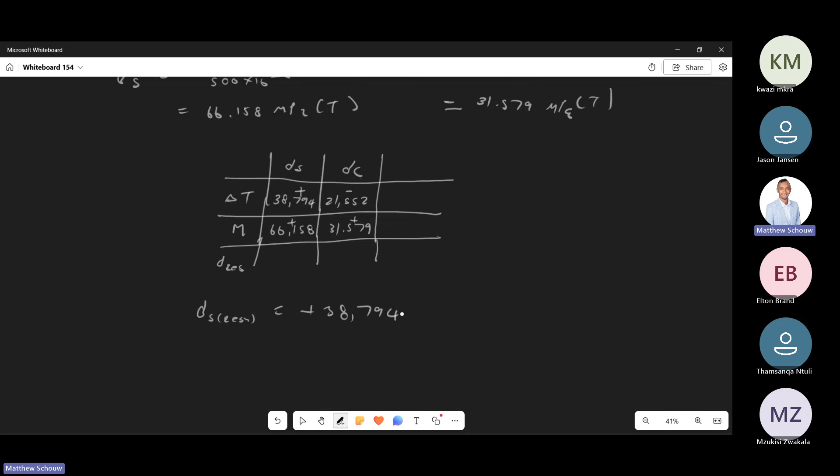So the resultant stress in the steel is simply going to be plus 38.794 plus 66.158. You get our answer. Obviously, this is in MPa, right? You guys happy? Okay, so I hope you're following this. Yes. Yeah, and then we do exactly the same for the copper, but the copper in this case, it's minus 21.552 plus the 31.579 MPa. So we're just adding. So here we add plus, right? So what do we get there?

104.952. 104.952. So remember, because it's positive, therefore it's going to be tensile, right? Are you with me? Yes. Because the last one is positive, and the bottom one, so it's minus 21.552 plus 31.579. It's 10.027. Is it positive or negative? Positive. It's positive. So therefore it's tensile. Done. And we've completed the question.

Welcome to N5 Strength of Materials and Structures, guys. How was that? Oi. No comment. Mr. Ntuli is thinking, why did I start the subject, huh? Kwazi, you good there? Now, I'm ending on this note, because we're at the end.

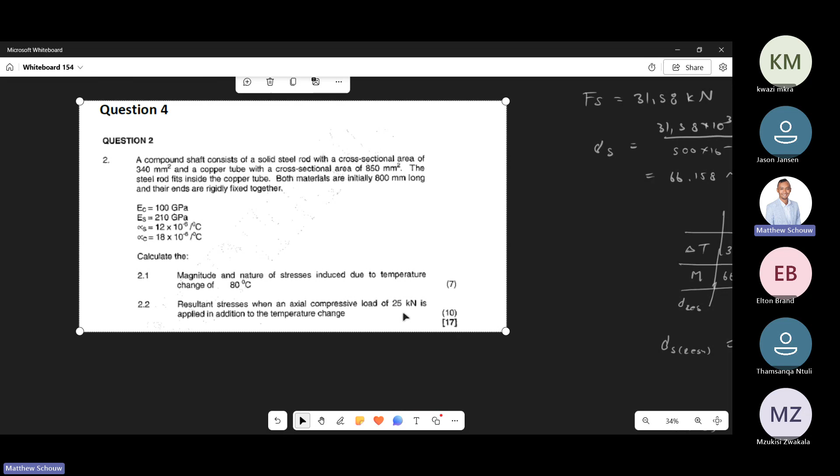So I'm gonna show you one question where it's in the questions I sent. You know what, I recommend you guys solve it and put the answers in the group. And where is this now? I'll paste it over here. Here you go. So can you see this one? Same type of question. Yeah, there's an 80-degree increase, and this one a compressive load of 25. Can you see now? Yes. Same story. So try this one and then put the answers in the group and we can all compare together.